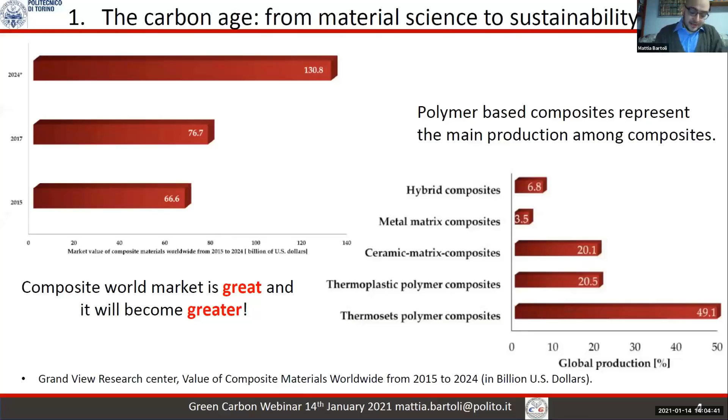Among all of the composite materials, polymeric-based ones represent up to 70% of all of them. Among them, carbon-based ones are the most relevant. So we started to study them, but we started from far. Our first studies were about very fancy fillers, such as carbon nanotubes, graphene, fullerenes. Those materials showed amazing electrical and mechanical properties, and they are great for electrochemical and optical applications.

But they have a very high cost. We are talking about hundreds of euros per gram. We are talking about hundreds of euros per square centimeter for real graphene. And the production of these very high-tech materials is quite complex, and in most cases it cannot meet the requirements for large-scale production with acceptable qualities and quantities.

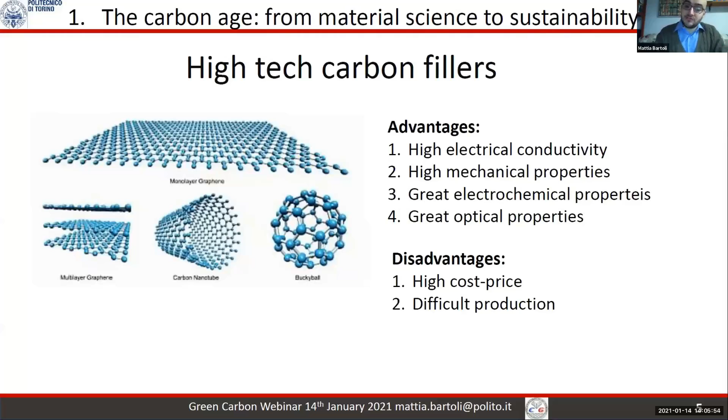So when we started to move around, search for investors, and talk with companies about our good results with carbon nanotubes and other materials, they said to us, okay, but the carbon composite field is different. And we found that the carbon composite field is dominated by another material, carbon black. Carbon black is the leader. When we are talking about composites that contain carbons, the first material that everyone uses is carbon black because it's cheap, because it's largely produced, because it can be tuned to selectively enhance the electrical properties. The main drawback of carbon black is its nature. It is produced from oil residues, so the environmental impact is quite high.

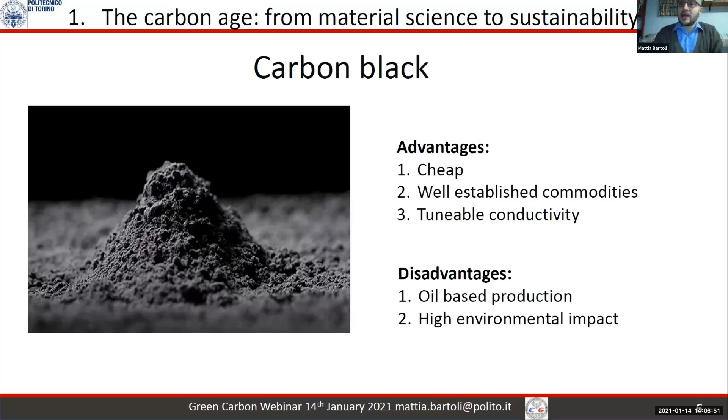So we moved on. We searched for something different, something more sustainable, but something that can match the high properties of carbon nanotubes and graphene with the price of carbon black and a lower carbon footprint. So we started to work on biochar, which, as all of you know, is cheap. It could be produced from renewable sources and waste streams, and could be tuned to selectively enhance the electronic properties. We found, of course, that there are some unresolved problems in this case.

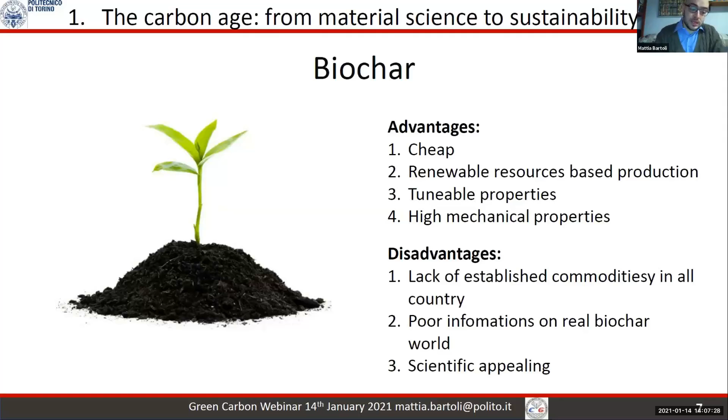For example, the lack of commodities producing biochar in every country, and more important, a lack of information and a lack of nexus between biochar producers and material scientists. So we started to work on biochar, and our first question was, can biochar replace CNTs in high-tech composites? So we started to evaluate the effect of biochar and CNTs in epoxy resins.

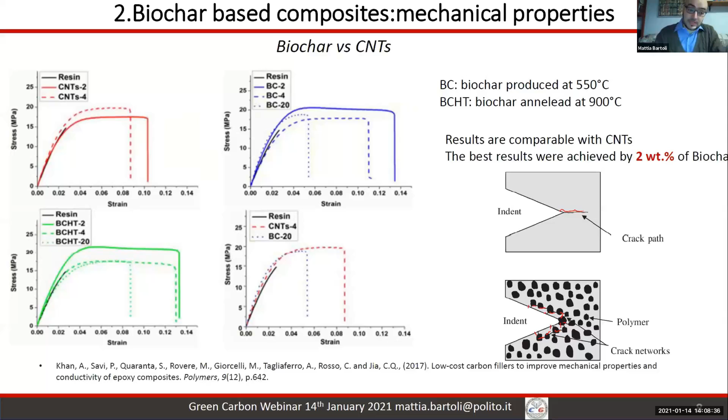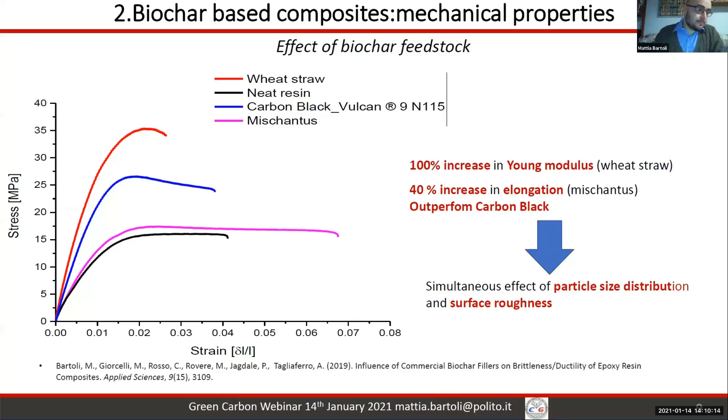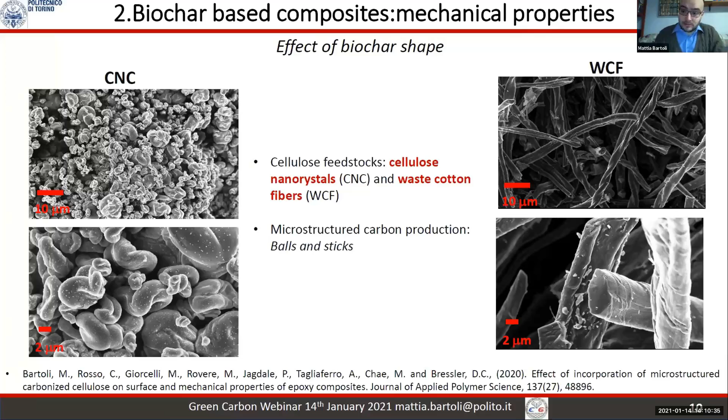A further step was to evaluate the influence of the shape of biochar particles on the mechanical properties. So we chose round-shaped particles produced from cellulose nanocrystals and carbonized them, on the left corner of the screen, and rod-like particles on the right. We found that there are differences, because waste cotton fibers after carbonization in high concentration inside the epoxy create a network that reduces the elongation. So also the shape of biochar particles affects the properties of the composite.

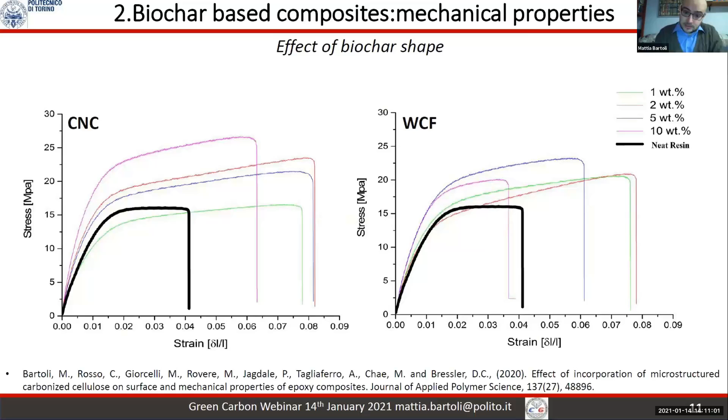Finally, we checked the effect of pyrolysis temperature and heating rate. Those are the main parameters that could be faced during biochar production, because they are very important for the whole pyrolytic process. And we found that heating rate is not so important, but the highest treatment temperature used for the production of biochar is a key parameter and could be used to shift from a brittle material to a ductile one. But those results could be shifted from thermoset composites like epoxy, the one that you saw here, to thermoplastic ones.

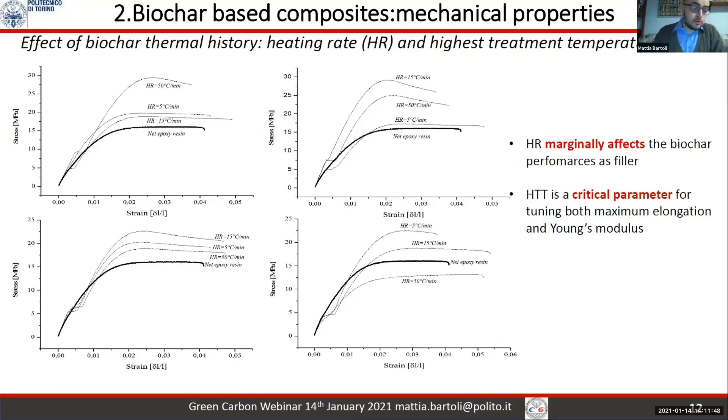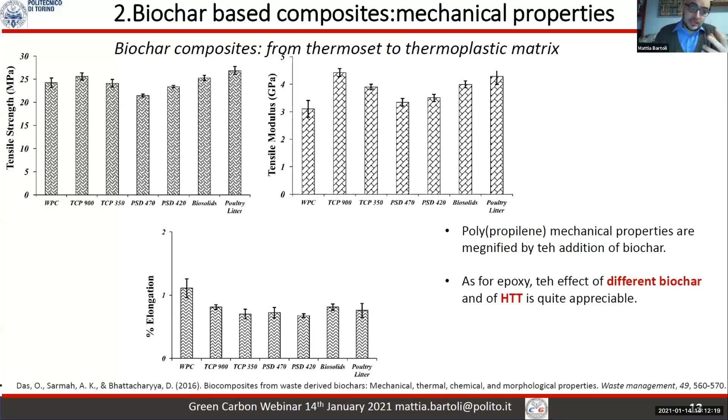This is the first pioneering work published from Bhattacharyya group on polypropylene. And you can see that tensile strength and tensile modulus could be enhanced by all the biochar that you use to produce the composite, but in this case, the elongation appreciably decreases. And this is very common for thermoplastic materials. The addition of biochar in this case generally induces brittleness in the composite.

But for thermoplastics, the way of production is also important. We tested several of them. Here you can see melt mixing and some solvent casting results. In this case, by using PLA and waste coffee derived biochar, the picture on the right, you can see the mechanical properties are not so enhanced by the addition of biochar, but the thermal stability is greatly enhanced. And this is very important for an application that you will see in the next slides.

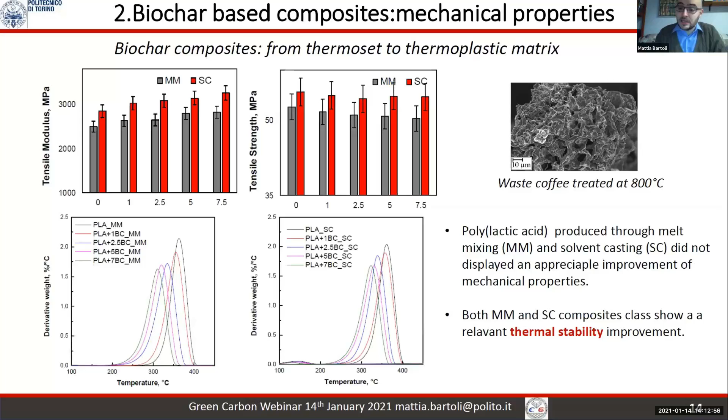But mechanical properties are not the only target when you produce a composite based on carbon materials. The other relevant property is the electrical conductivity of composites. And in this case, the story is a little bit tricky for biochar, because the electrical conductivity of biochar is strongly related to the temperature used to produce it. A good conductivity could be achieved for temperatures above 800 degrees. And this kind of temperature for the processes requires an investment in energy and cost. And we are looking all around if this investment in terms of energy and cost could be counterbalanced by the properties. And the properties of biochar at higher temperature are very interesting.

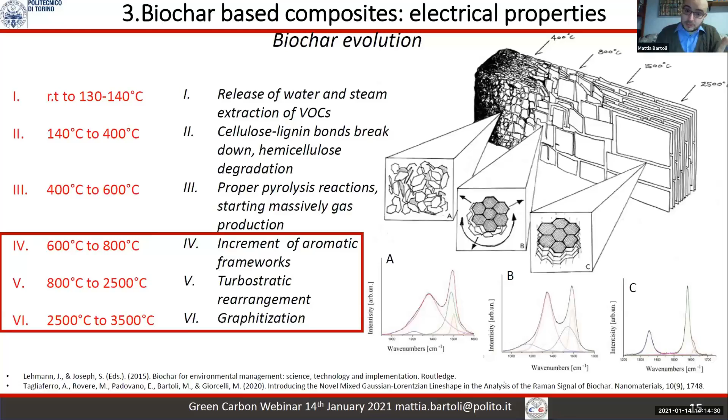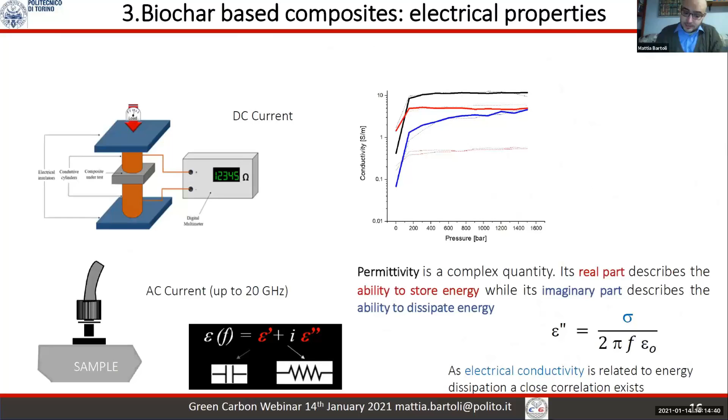On the right of the screen, you can see the evolution of biochar monitored by Raman spectroscopy. Here there is a particular way of approaching Raman of disordered material that we developed for the analysis of biochar. But you can see that at higher temperature, biochar becomes more graphitic, even if it is a non-graphitizable carbon type material. As in the case of mechanical properties, we compare biochar with CNTs by using mainly two different approaches, one in DC current and one in AC current, to evaluate everything that we can check. But before this, we confirm that temperature is relevant for conductivity. Even an increase of 50 degrees during the production of biochar induces a very different conductivity in the final material, as you can see here for miscanthus.

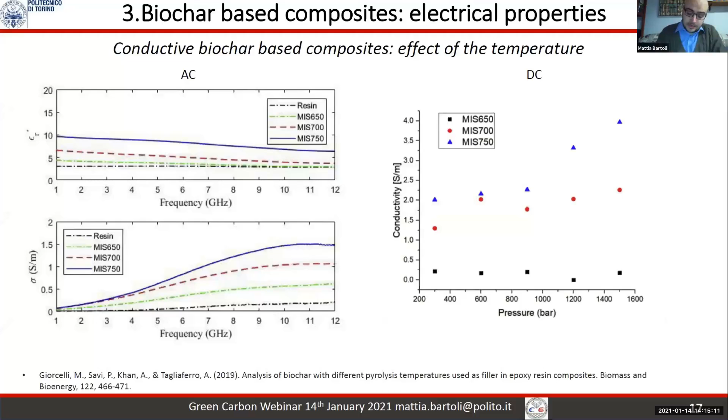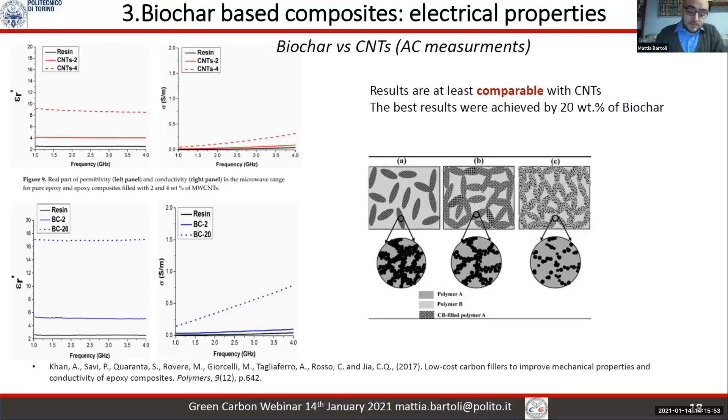So, CNTs and biochar for composites containing carbon materials. As you can see, CNTs in concentrations of 2 and 4% displayed a good conductivity in the composites. Nonetheless, biochar in higher concentration, up to 20%, can outperform, at least at higher frequencies, the results obtained with CNTs. And this was due to the different distribution of carbon particles inside the polymeric matrix. CNTs display the tendency to create agglomerates, while biochar is very easily dispersible in all polymeric matrices.

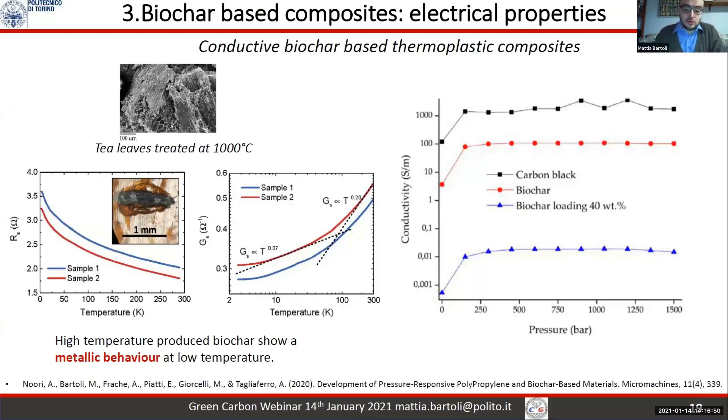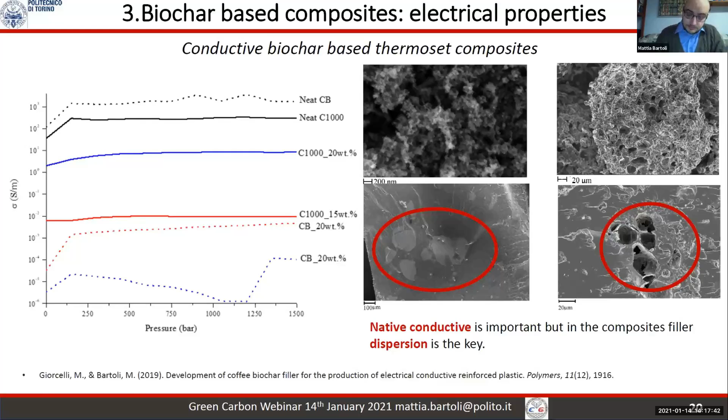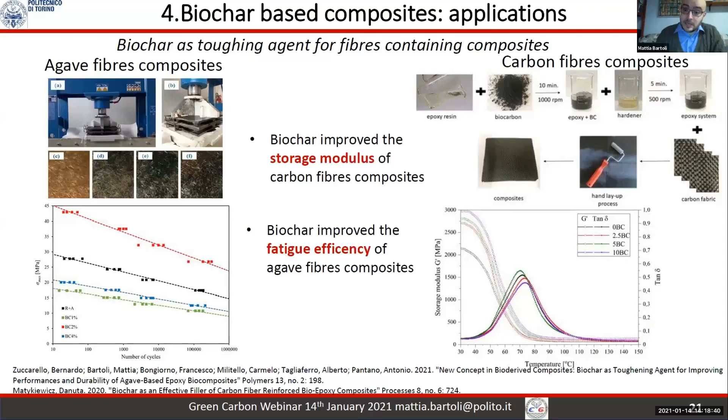From these studies, we came to the applications. Firstly, biochar could be used as a toughening agent for fiber-based composites. As Matykiewicz showed for carbon fibers, the addition of a very small amount of biochar could enhance storage modulus, decreasing the brittleness of the composites. Similarly, fatigue tests that we did for agave fibers composite after the addition of 2% of biochar show a great enhancement of durability of this kind of composites. And this is one of the great goals of the use of biochar for these materials, the durability. So the increased life of all the materials based on biochar is a quite strong point.

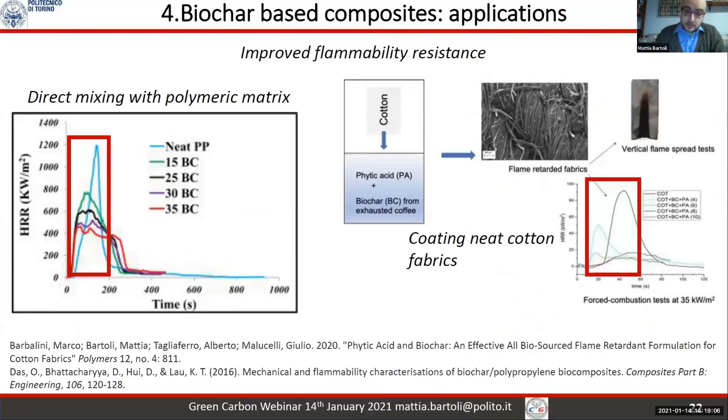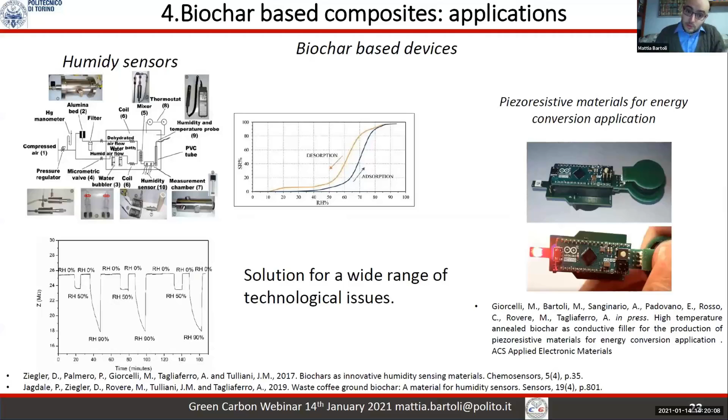So, in conclusion, the point that should be taken into account for the production of biochar-based composites is that a groundbreaking event that can spread the biochar use far from soil applications or water purification is missing. The scientific community is a little bit skeptical about bio-derived carbon, or simply biochar from pyrolysis, as a replacement of high-tech fillers. But there is space for new applications, there is space for innovation. So the use of biochar as filler for composites could be a very strong advance for the spreading of the use of biochar far away from the current state of the art.

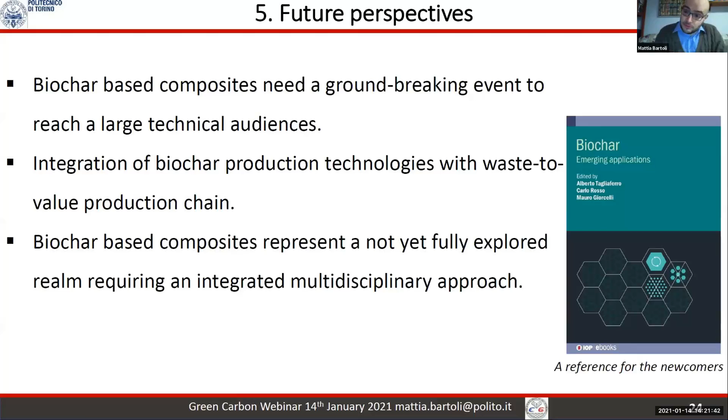I can understand it's a little bit difficult, and it's a field that requires a lot of multidisciplinary approaches. So after years and years, we also wrote a book about this, providing a general overview about what we can do with biochar in very advanced fields. And we firmly believe that biochar could represent a game-changing material for carbon scientists, a material that can lead the transition towards a society that's more accountable for carbon footprint and sustainability. With this, I finish my presentation. I thank you for your time, and I'm ready to take your questions.